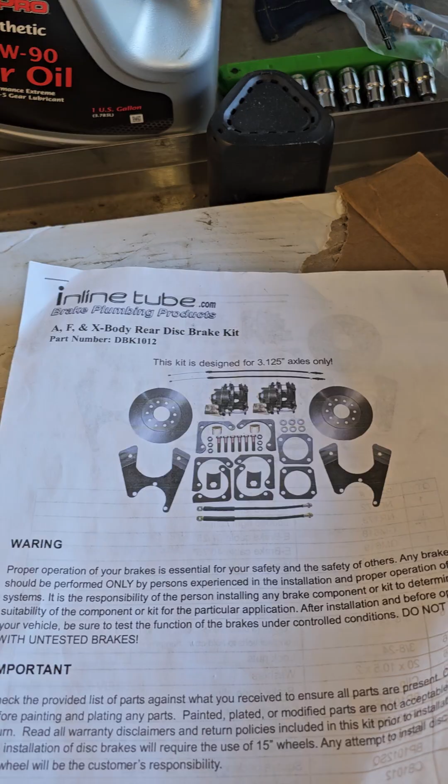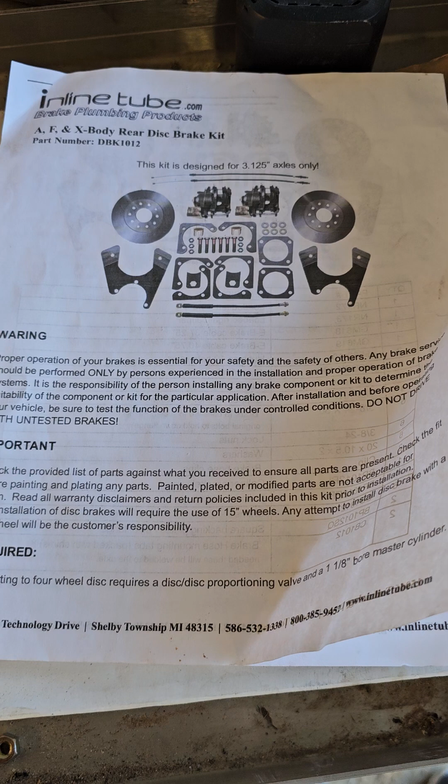Hey guys, this is Chris with the 1990 Pontiac Firebird. It's been a while since we got on here to talk about updates I've done to the car since then. This one's been something I've been working on for a long time, trying to get everything together and gather all the parts correctly.

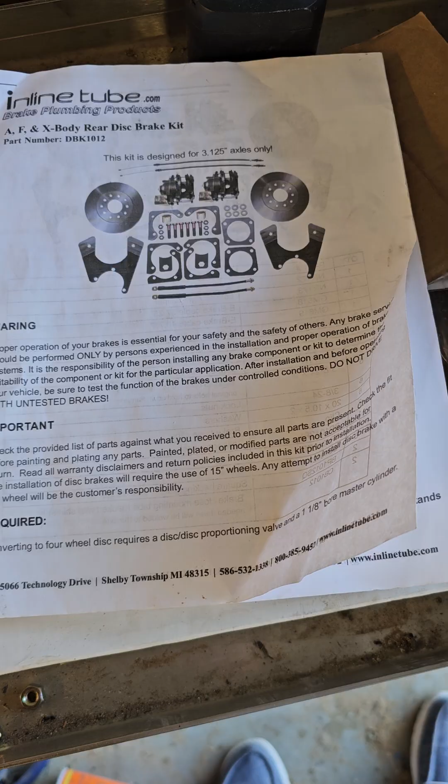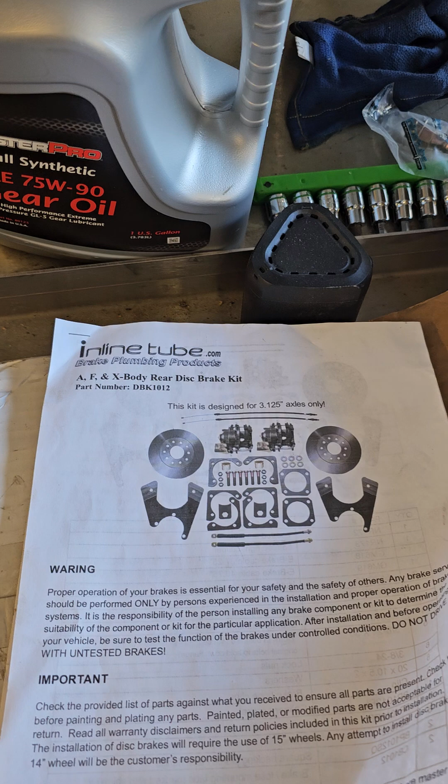I wanted to do the disc brake conversion from the drum brakes on my 90 Pontiac Firebird. As you can see, I've had it up on the lift for quite a while. I actually started this on New Year's Day - first chance I've had to get everything together, my life settled, and things done.

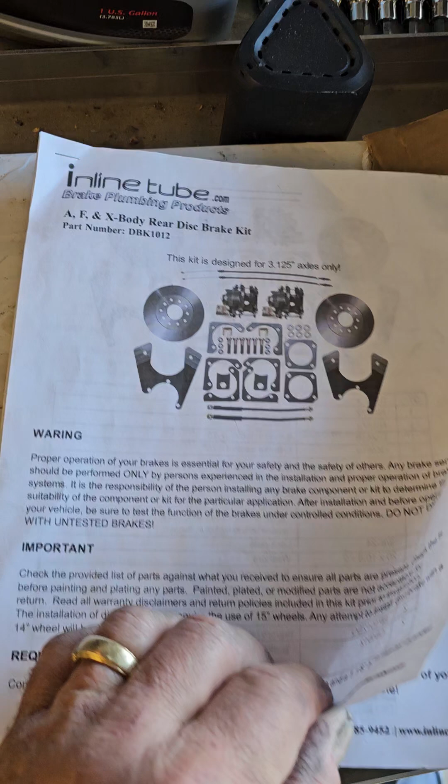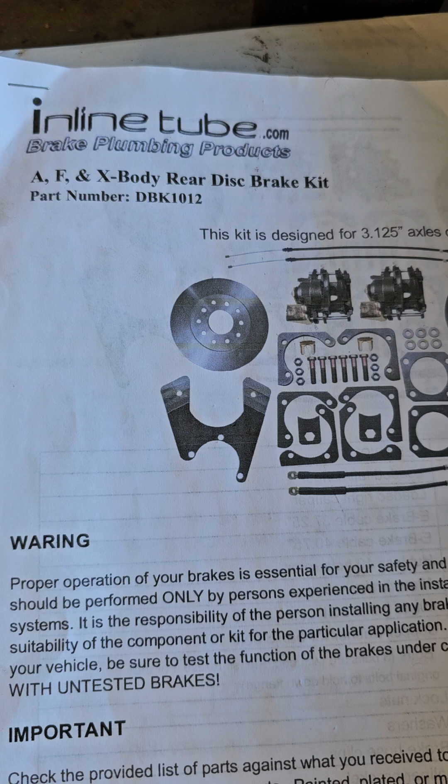So, long story short, I bought this kit from Inline Tube. The kit, as you can see, is not what you'd expect. This is for basically the 71 to 80 Camaro and Firebird style rear ends, but this is also the setup for the Firebird and Camaro.

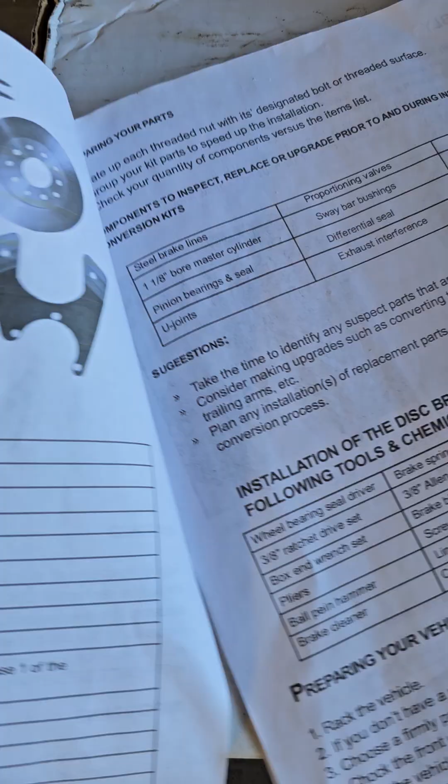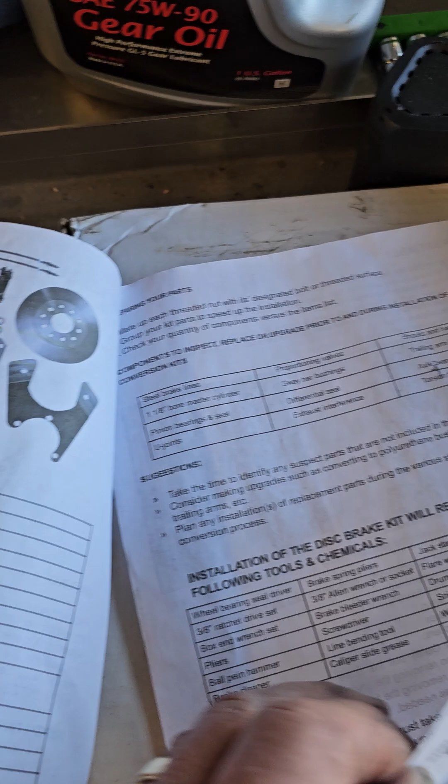Now, the parts here are similar but not similar, and this is what made it so difficult for me and where I've been struggling this whole time. When I tell you that this instruction set is incredibly difficult, it's because it is.

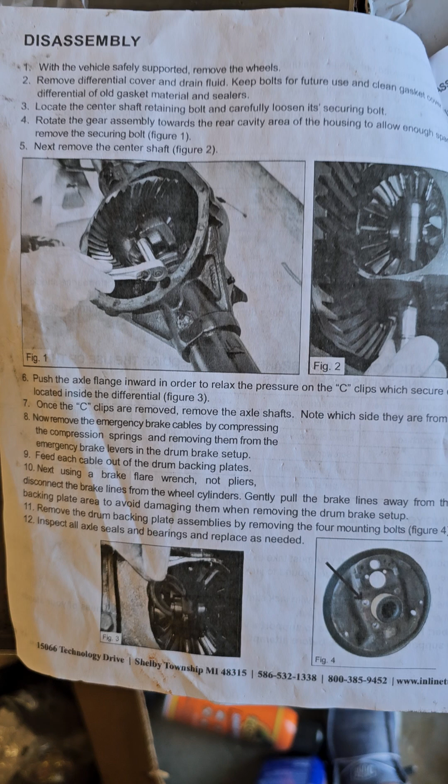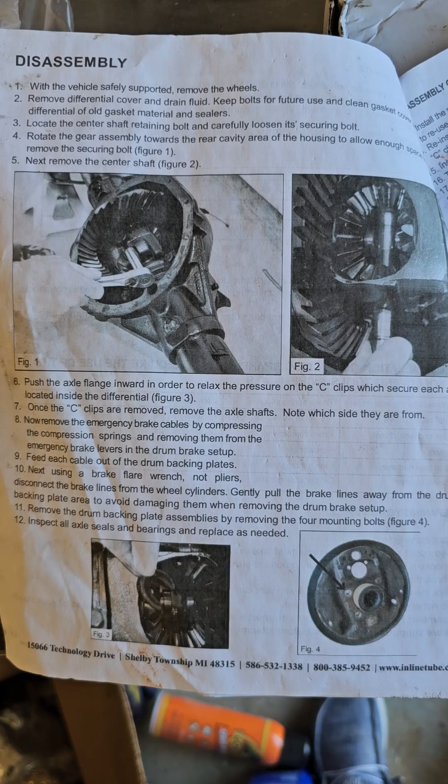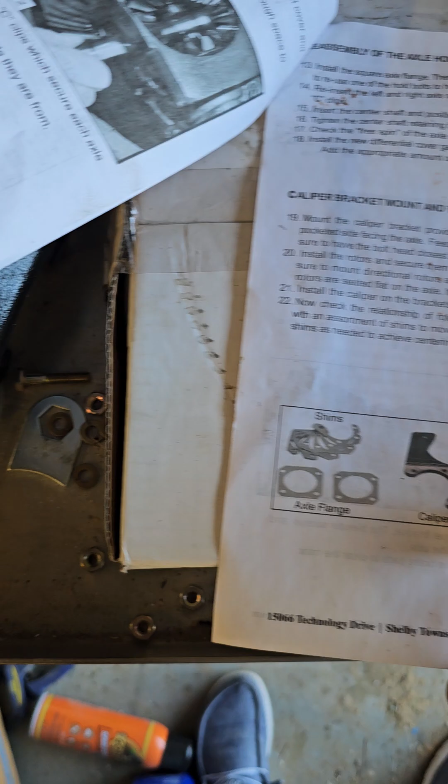The information they provide is relatively the same as far as pulling out the axles, removing them as needed, and replacing them. The problem is, with the instructions here, none of these look like what actually came in the kit. And that's the problem, okay?

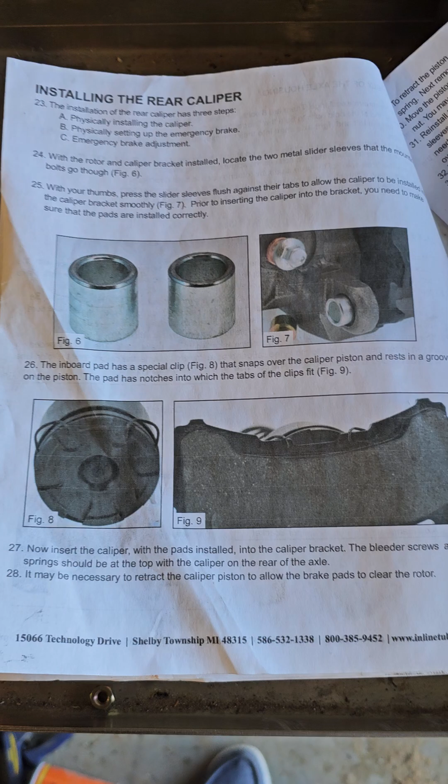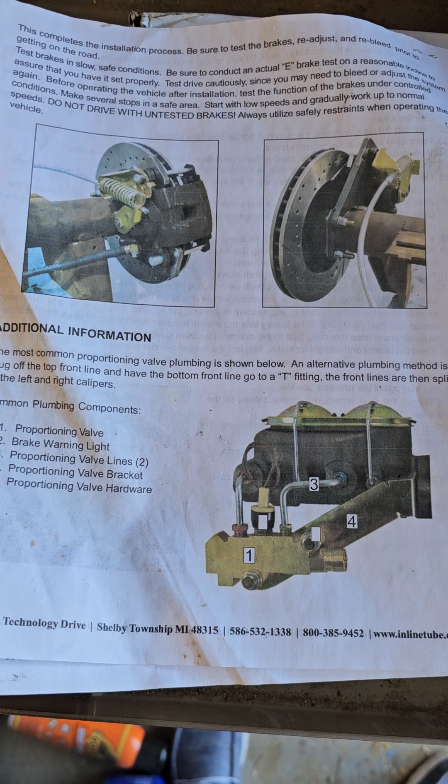I called numerous times for help and support on this kit, which basically wasn't much of anything, to say the least. They have 3 videos on there, and most of them only cover the 71 to 81 Camaros and so forth.

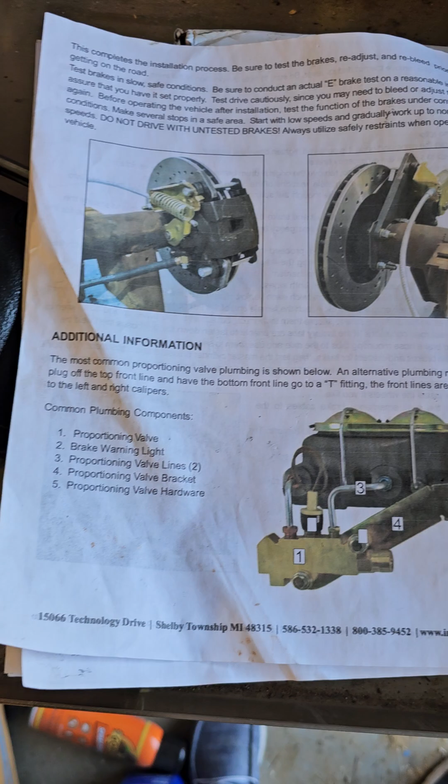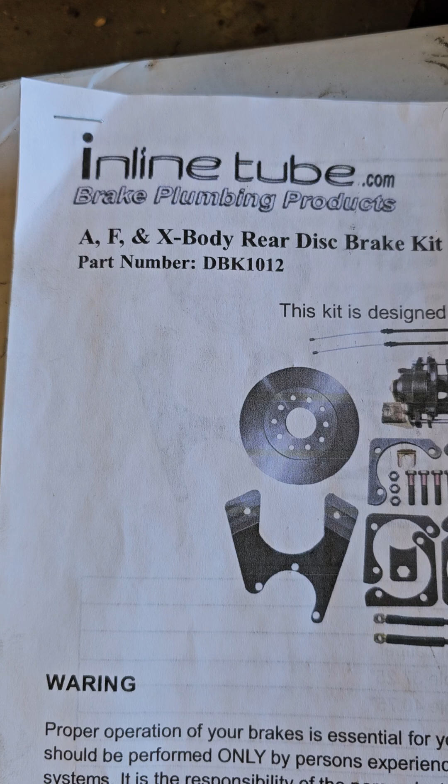And those videos from Inline Tube are what they sent me again. So this is the right kit, but they sent it with the modification for the 82 to 92 type of rear end, which is what I had.

So let's take a walk over here and see what I had to come up with so you understand this. This is the final piece of the puzzle with everything on here.

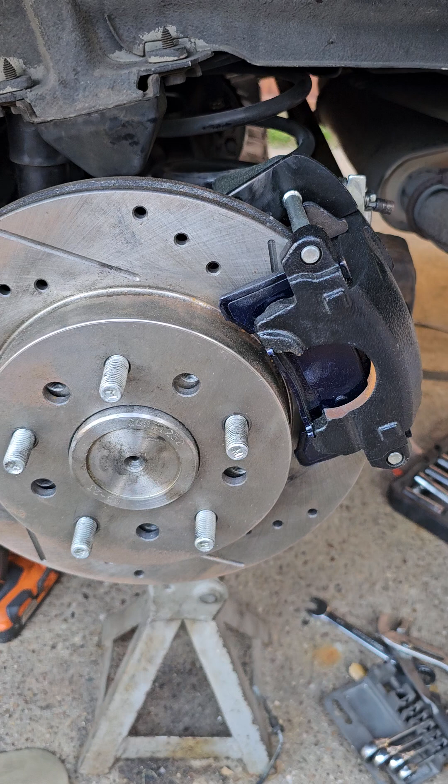Finally, after a month of trying to play jigsaw puzzles and Jenga with this thing, taking it on and off, taking the axles in and out at least 10 times before I got it straight. The parts have to be almost custom made in many ways, in many shapes.

And finally, what I'm going to do right now is show you what happened, what I had to do to finally make sense of this. I was watching the video one more time from those guys to realize that what I did was put it together thinking the plates go together, when in reality they don't.

On the other side, which I purposely left off so you can see this and understand how different this whole system is versus what they sent.

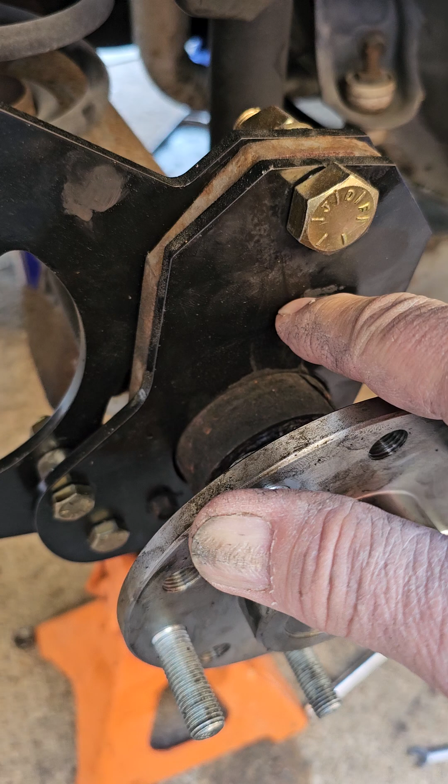So when I pull this thing apart, this plate and this plate here appear to go together like so, when in reality this plate mounts directly on that type of axle correctly, but it's this plate that created all the havoc and why I had to keep taking the axles in and out.

And these, by the way, I did put new axles in. This in itself was another nightmare. So you understand, if you order axles for your Firebird in particular, these axles are the 4.75 by 5 bolt lug pattern, but the distance was what caused a nightmare.

The distance on these was 30.5, whereas the ones they sent me first, which I got the Force 10 - one of the other people on here shows for the Camaro - thinking nothing about it, the spline was right, the axle was right, but the distance was wrong. They sent me a 31 3/4 distance, and that created a huge nightmare.

In and out, back and out, not knowing it wasn't the correct one because the instructions were so poor. I originally thought those longer axles were needed because we were converting to disc, but it wasn't. The same exact axles needed to be put back in.

So I had to send back the Force 10 type of axles and go with another company called National Drivetrain, which is where I got these axles from.

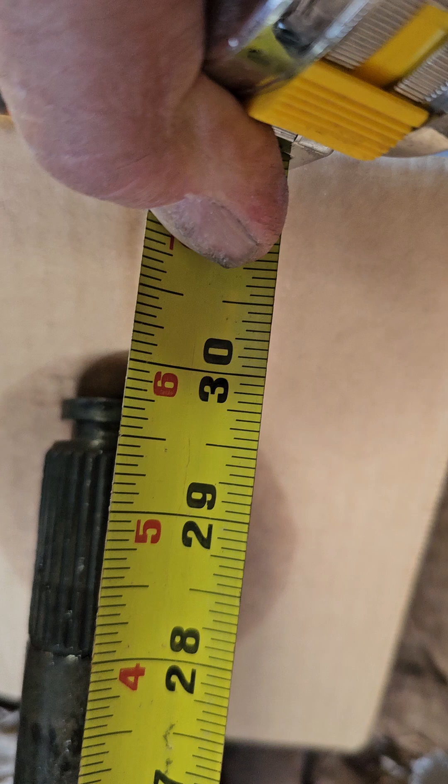From here to here, it's hard to do this in this box, I'm sorry. It's 30 1/4, okay? 30 inches basically is the size of them.

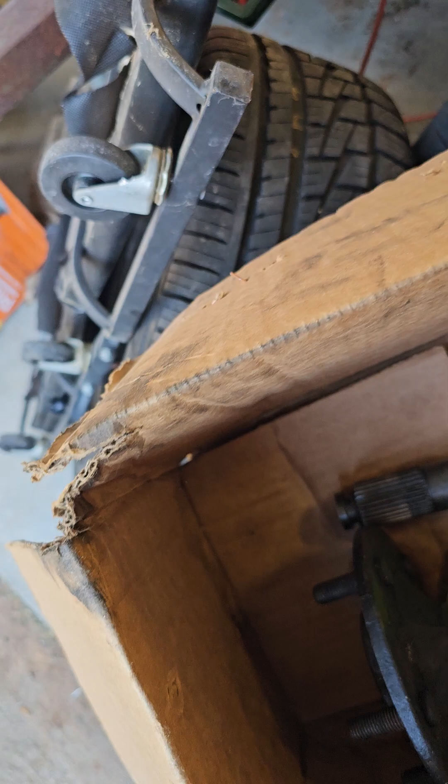The problem was, again, was not that these were that much of a difference. The problem came with the axles themselves, and here it is: 30 1/4, 5 lug. That's what you need right there. That's the one, the MG 1020 axle.

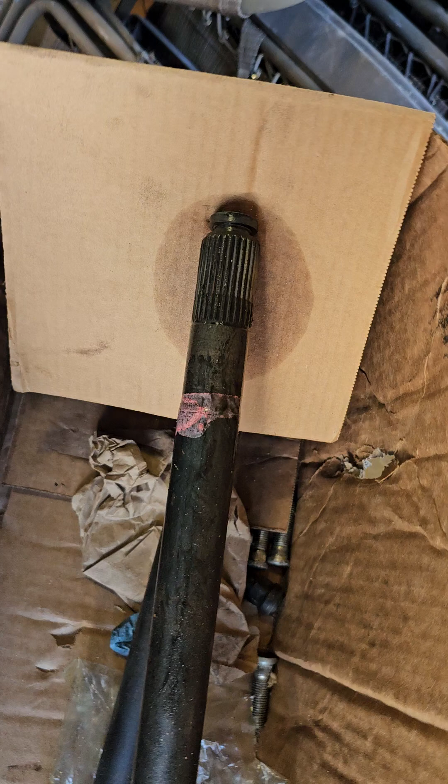But again, what you can't see is that when I put these in, the actual pin that has to be put between the two would not fit again. And so I literally had to take the shafts out one more time, and I had to grind down this axle shaft almost a 1/16 of an inch on both sides before the shaft in between it, which holds this pin in here, would fit between them again. Nightmare. Absolute nightmare. Got that in several times.

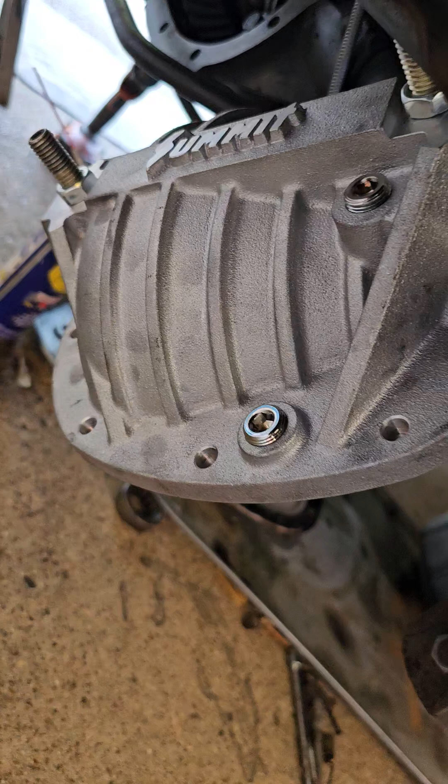I ordered a new cover from Summit. As you can see, only Summit's instructions with this are also not clear.

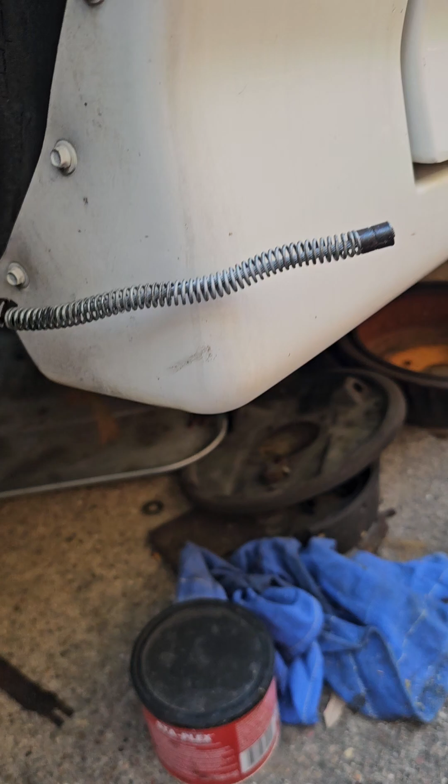These studs right here, this one and this one, as you can see, are for, and what I'm told, and it does not show on their website either, those studs are for the emergency brake, the parking brake. Somehow or other, that parking brake right there is what is supposed to be strapped to those at some point with whatever kit that goes along with.

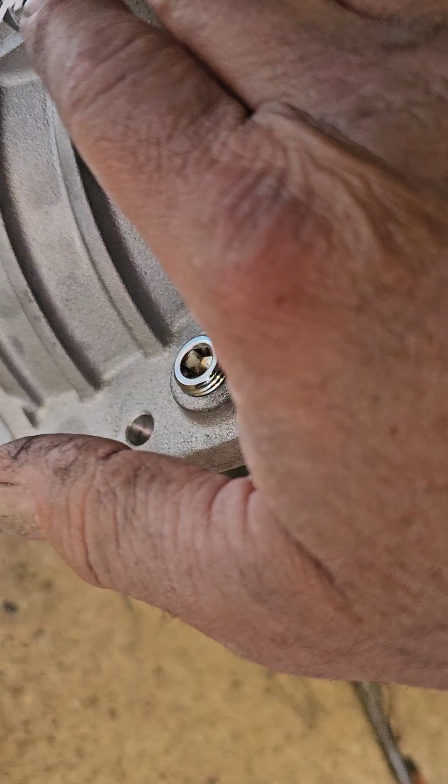10 bolt standard, 10 bolt standard cover, and you need these two. This is the drain plug, that's your filler plug. Those did come with it, okay? But those right there did not make sense.

And so my first instinct was to put them in reverse, because I thought it went in flush. Luckily, like Inline Tube with their customer service and support, I called them up and they were spot on. They were helpful, and they told me, and they gave me explicit instructions that those had to be facing out. That is what those are for, and they were very helpful.

So I'm not putting Inline down. I'm just telling you the instructions, and I told them about this on the phone, so this is nothing new. Their instructions are poor, and they should be modified for the 82 to 92 model, especially when it is correct, but it's very difficult to understand.

So let's go back through. Again, what I did the first time was I took this plate, and they were together, okay, and in the front. And why I had to keep taking this apart was I could not figure out how the actual caliper went on here, because it ended up still jamming against here.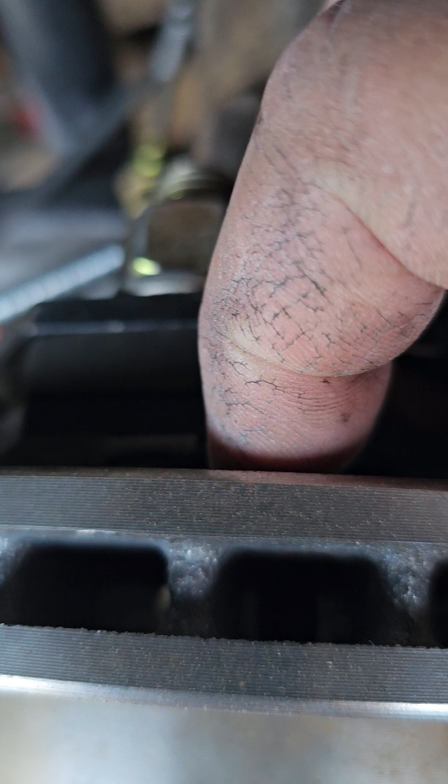The other thing that was very hard to understand also was the bolt here. Initially, the bolt looked like it was too close, so as you can see, I ground it down. I actually ground off almost 1/8 of an inch because it was looking like it was scraping against the rotor, and basically when I bolted this up to it, it stopped it from moving. Now it's not like that.

Lastly, and Inline does not have any explanation for this at all, which again makes it very difficult to manage, was why the parking brake cable has a spring and another spring inside it in order for it to be bolted on. The only reason I figured out that this secondary plate here goes behind this was by coincidence that I happened to watch the video again and saw the other plate that he mounted behind the axle, behind the differential housing.

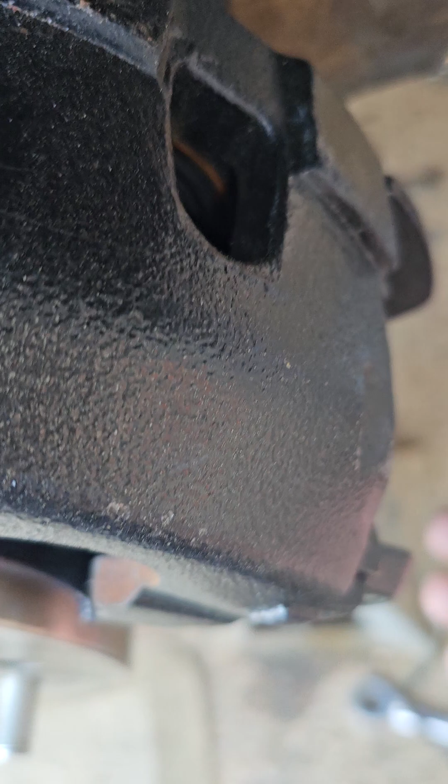That's the only reason I noticed that needed to go behind it, and that made all the difference. That also explained why these spacers right here, one there and one behind it, separated them. Again, I had no idea.

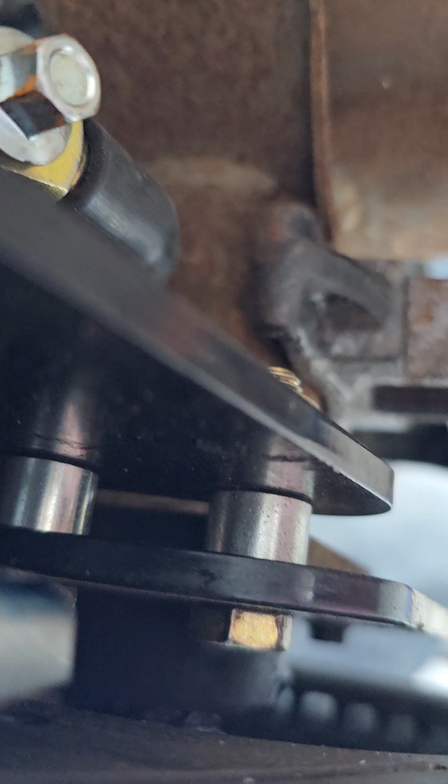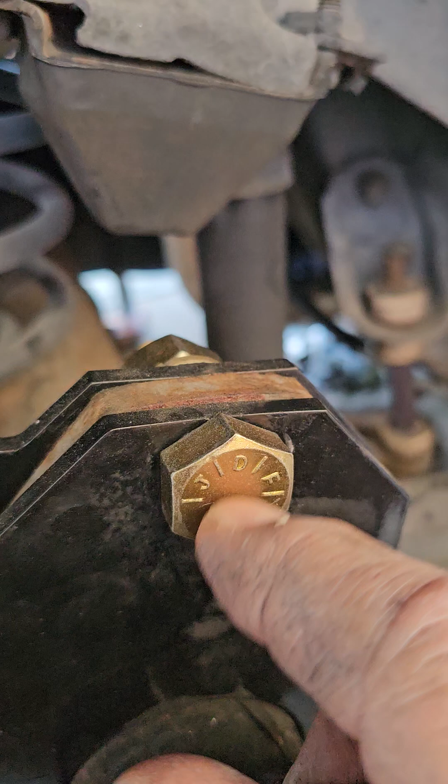Something didn't make sense because the bolt was too long, and I didn't understand why initially until after I happened to spot that, and I figured out that the reality is the front plate goes on the axle housing, and this one goes behind it, and in reality the bolt did not need to be cut. It needed to be moved back, and that gave me the actual almost 1/2 inch difference in space that I needed for the caliper to sit on there and ride correctly.

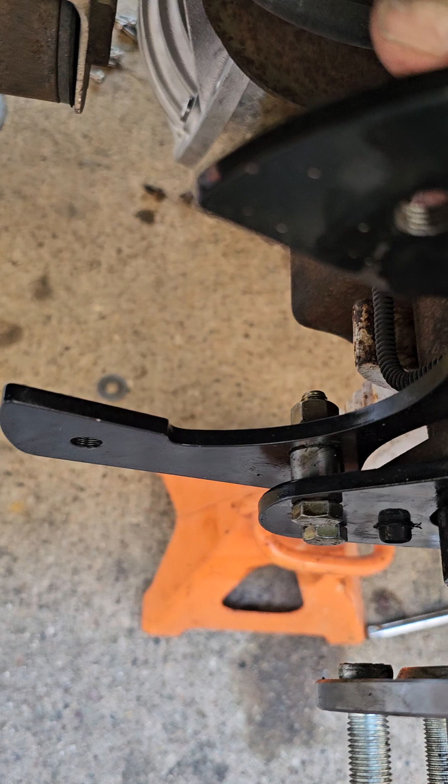And now you can see those additional spacers, which I thought went to the caliper also, actually are the spacers that go in between here. And now it makes sense why that bolt was as long as it was.

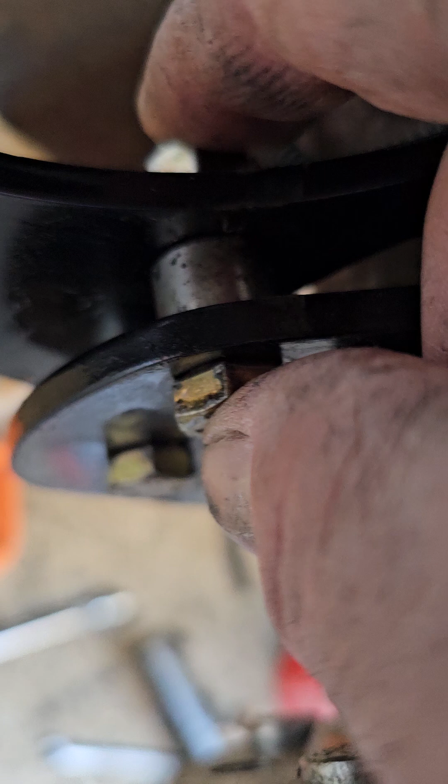So this has been a nightmare. It's finally coming together. I'm finally going to have this thing together. But the last thing I have to do, and which I want to show you also, which is in the instructions, but you have to go find these parts, is the master cylinder.

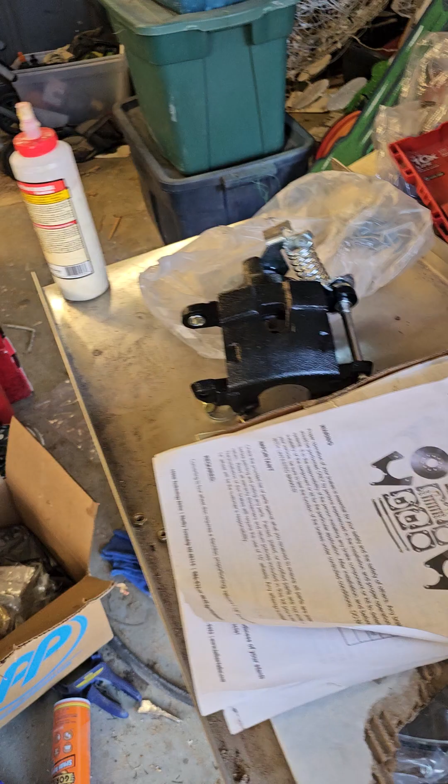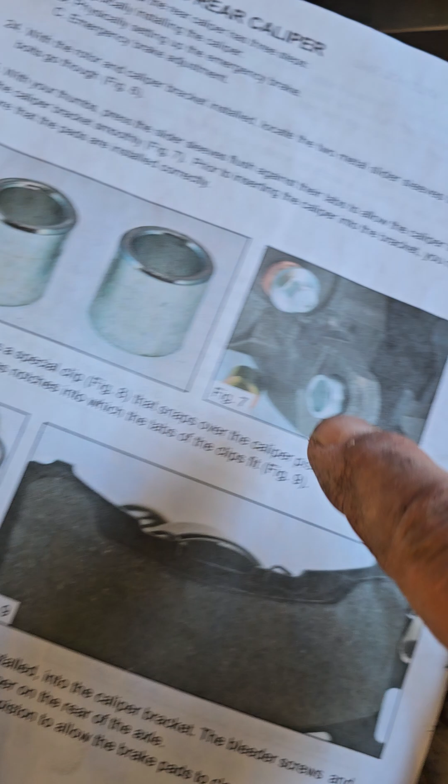You can see that spacer shown here is the same spacer that they give you. These two are the same as the one that goes in your caliper, but they give you an extra two, and nothing in here will tell you anything about that. It just gives you the parts.

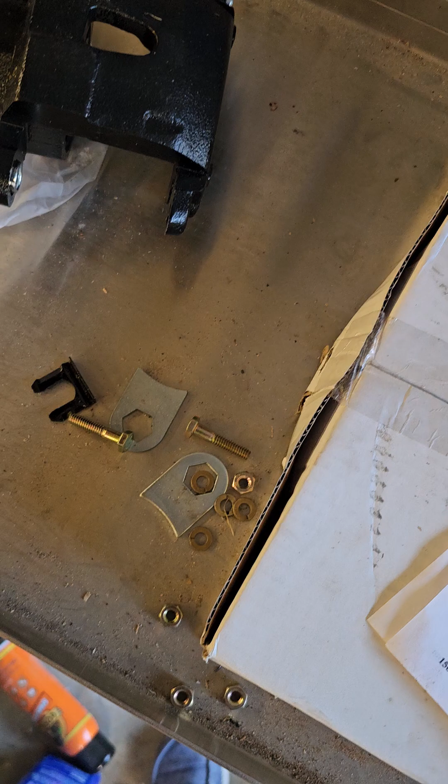Last thing you have to know is the residual parts. The brake lines did get included in mine, but because of such a delay, I actually threw mine out without knowing they were in the box. But these here have to be welded onto that axle shaft, which I'll have to have done at a shop. I don't have the ability or a welding setup here.

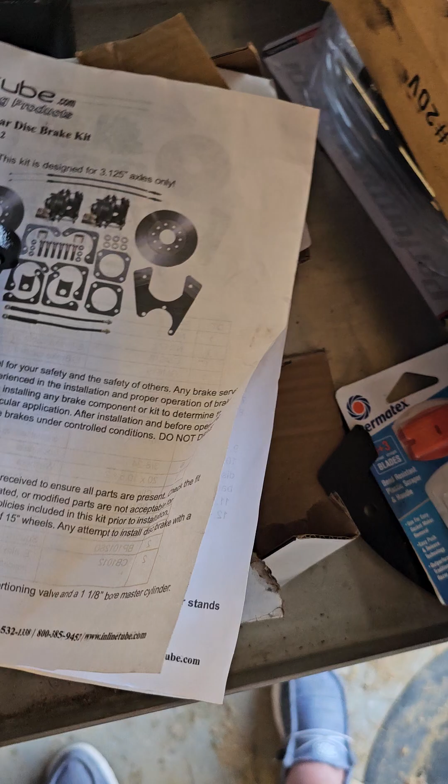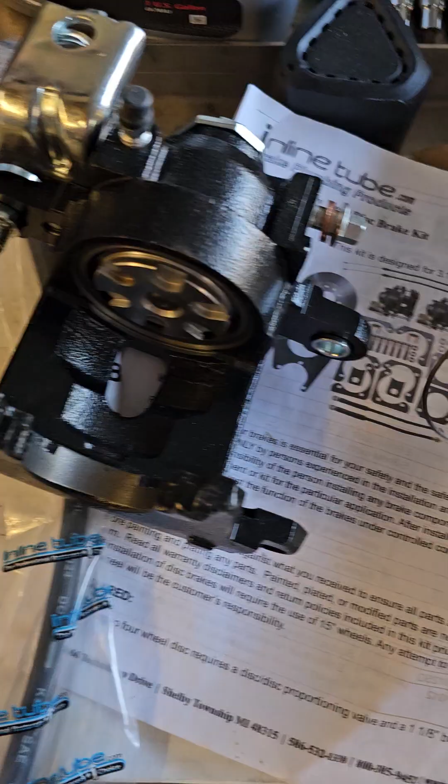The rotor and calipers are straightforward. But one last thing I want to show you is these. They come with this little locking ring that goes on here, and it holds this one in place. The problem is, when I was fiddling around trying to figure out how this thing went together, I could not get these things to stay together.

One thing I've always done is use my brake quiet, that's what the blue color is. That made a huge difference in keeping them in place. It gives a little tacky surface to stick to on both sides, so you don't have them fiddling around and coming off.

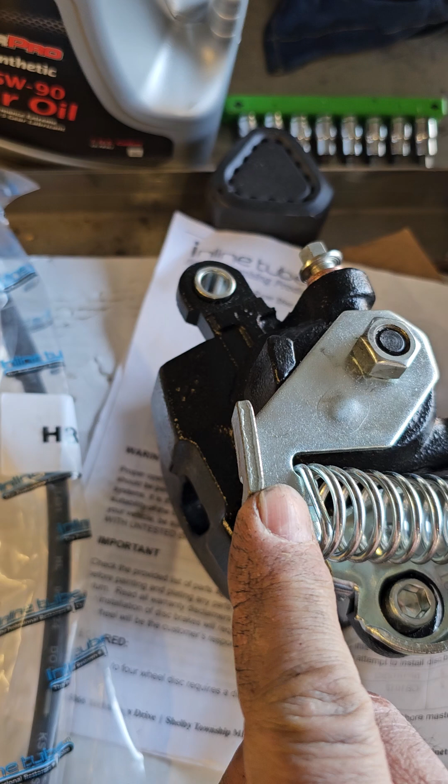Just know, when you're dealing with this caliper, there's your brake line. In itself, you have to put the parking brake line through here, and in many cases this spring will come off, and then you're going to fight with it as well as trying to get the parking brake locked into here.

I just happened to figure out how to do it. Basically, all I did was run it through there. But don't make the mistake I made. Do not lock that in place, do not pull it all the way through. I grabbed a pair of pliers and literally left that behind there, then pulled the heck out of it to get it into that little notch where it would actually fit.

It still was not an easy task to do. Once I had that in there, I pushed this grommet into where it actually will fit and lock into place. So, one more little detail.

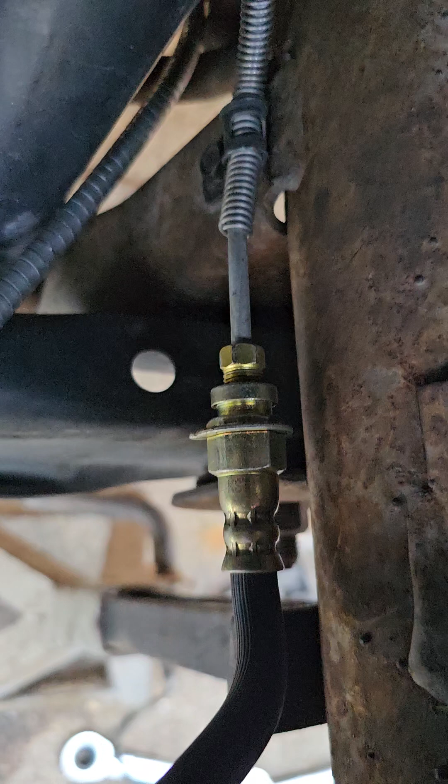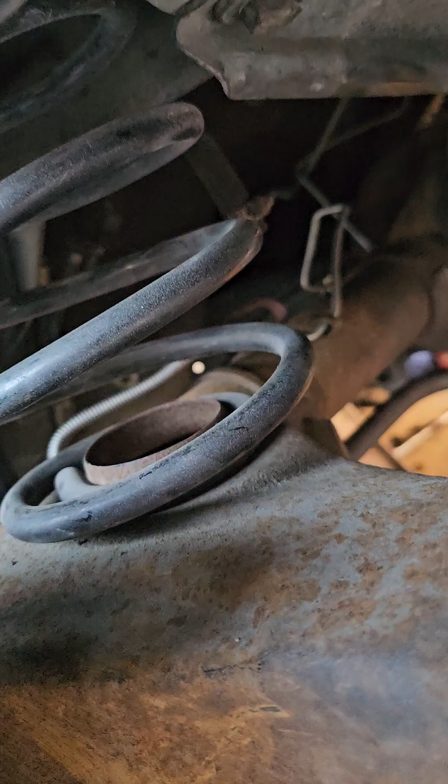The brake lines, oh my God. The brake lines they send you with the kit are not to scale, not lined up like anything you'd imagine. I had to bend and prod and figure it out based on the locking stuff already in there, and kind of custom fit it to my own. If I had to do it over again, I'd take it to a brake shop and have them make me brand new stainless steel brake lines.

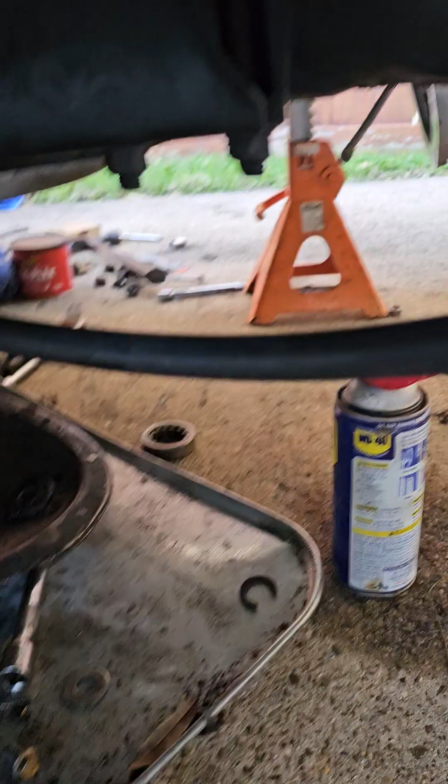With that, just know one other thing. Get underneath here so you can see this. Where it connects into that little housing is also something you have to custom fit, and I almost messed up the threads on it, to the point I had to completely take it off. As you can see, it's completely disassembled here. I had to re-straighten the threads mildly and was able to get it to go into place.

So, I'm glad this is done, and glad I'm going to finish it up and actually have it going. But I just wanted you guys to know that the one you see from Camaro shops and elsewhere is not the same. In no way, shape, or form is this system anywhere like the ones he shows, where you have to drill it out and put a different system on, and so forth.

One last thing also, the caliper itself. If you look online, there are varieties of opinions out there, so I'll leave it as an opinion. I was curious to know, should it go in the front or the back? I had various conflicting information out there. Thank God when I figured it out, I determined that the caliper went towards the back of the vehicle, not the front.

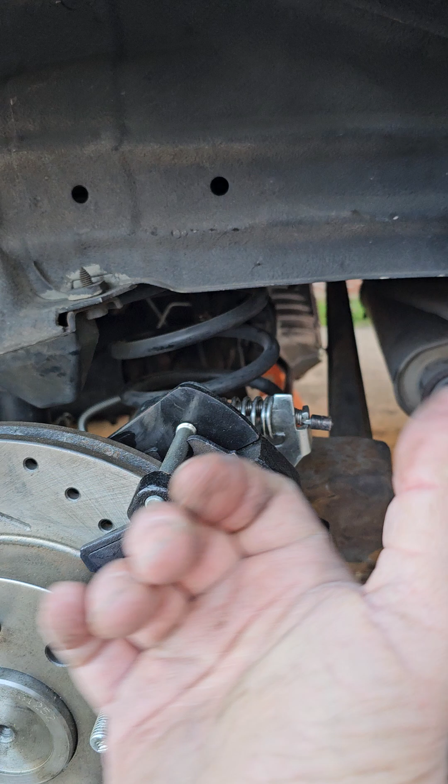So that's it. Know you're dealing with a huge job by doing this. It can be simpler now that you have the information you need and understand there's a process you have to go through. If you don't need to replace your axles, which I probably didn't, I just do things like that. I'm proactive about things. As long as I have it apart, why not replace it.